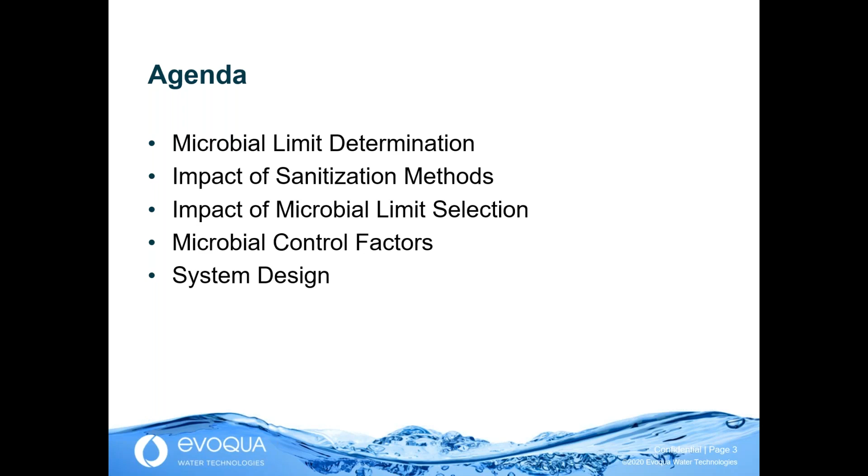An hour is a short time for this amount of material—we could fill 8 hours with it. So we're going to go at a very fast pace, but I think we'll be able to give you a good overview. First, we're going to talk about regulatory requirements and risk assessments.

So how do you determine the microbial requirements for your water system? You need to know the product types produced and their use. Your team has to be able to do a patient risk analysis from that product use. What's the point of manufacture? Where are the products shipping? What is the water used for? It could be for active ingredient production, rinsing, or in a dosage form. Even if it doesn't remain in the product, such as in a tablet, the water still falls under good manufacturing practice.

In addition, you need to know the pharmacopoeia limits for the water—typically purified water or water for injection. There may be additional regulatory documents to consider. Some of those could be legally binding, some may be non-binding, but if it's a regulatory guide that could be applicable, you want to know what's in it and understand whether you should follow it, or if you don't follow it, how you could explain why you don't need to, or that you're doing something better.

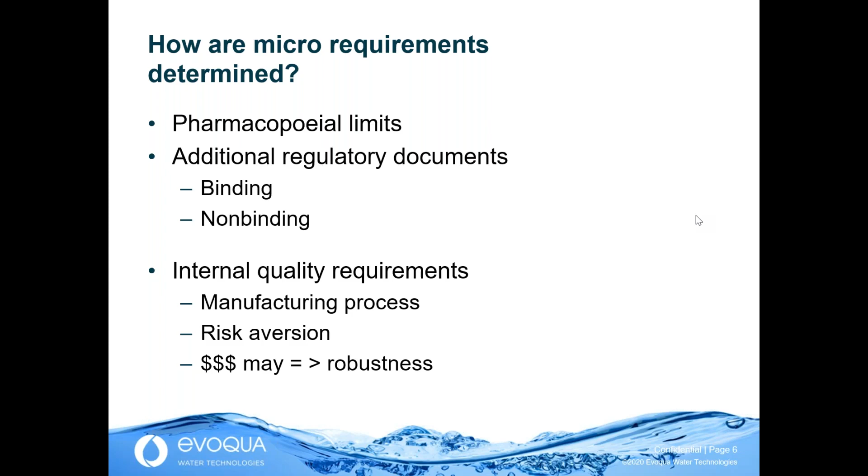Thanks to A.M. Cundell for this slide, but it's an overview of products.

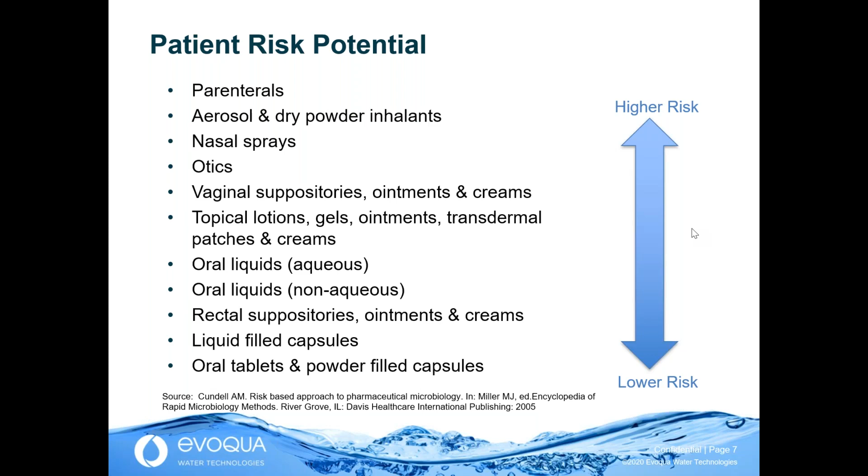So parenterals, as an example, aerosols, nasal sprays, those are high up from a patient risk standpoint, whereas liquid-filled capsules, oral tablets, etc., are at the lower risk. So this may help you to start with an understanding of risk.

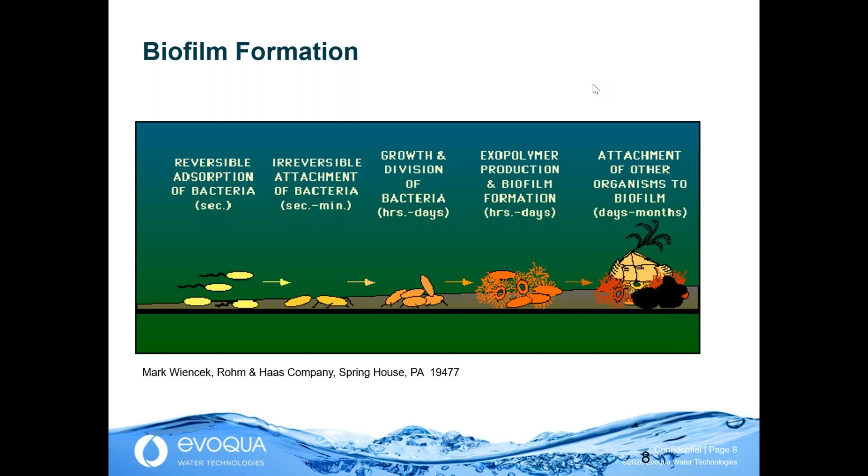Getting into pharmacopoeia requirements, the current USP Pharmacopoeia, edition 43, in the purified water and water for injection monographs, that's the legally binding section for water. Interestingly, the microbial limits are not stated there. So you might say, well, there's no legal requirement. In the general information chapter 1231, that is where purified water is shown at less than 100 colony forming units per milliliter. Water for injection is less than 10 CFU per 100 mil. But everyone accepts these as actual limits.

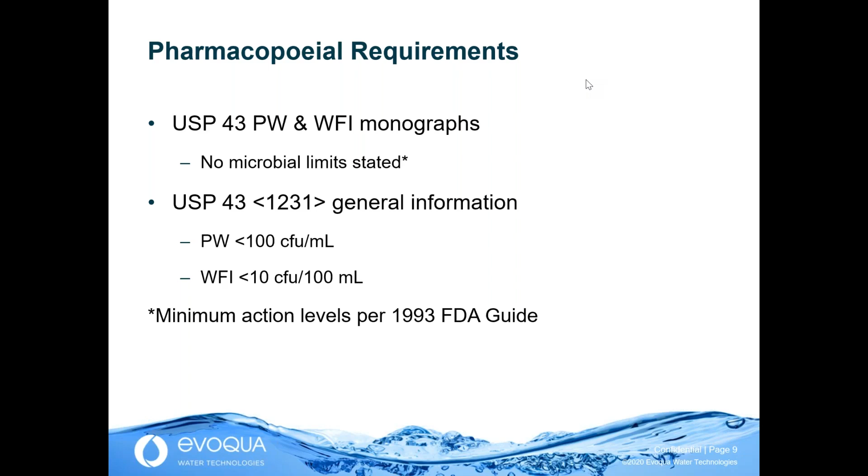In the 1993 FDA Guide on Inspections of High Purity Water Systems, FDA stated that these levels, which remain current from that time, they actually take them to be in the monograph or not as actual limitations. If we look in the European Pharmacopoeia, there we have the same values, 100 CFU per mil for PW, 10 per 100 for water for injection. Those are in the monograph.

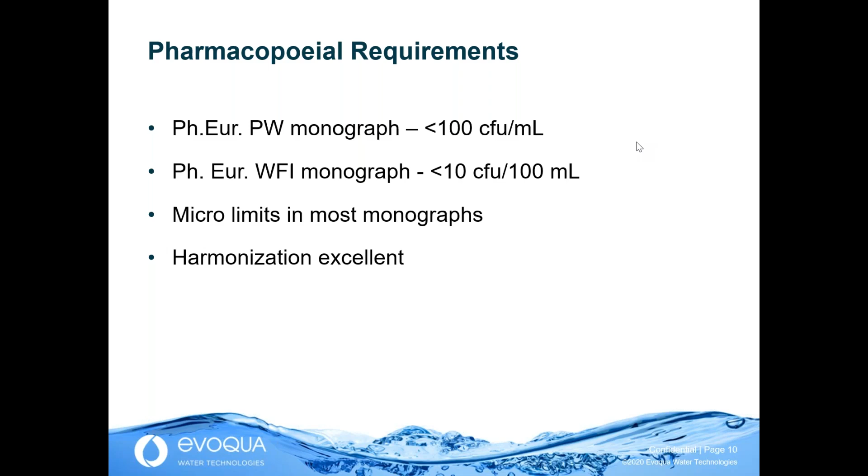Looking at this, there are over 140 Pharmacopoeia worldwide now and ever growing. In most of those, the microbial limits are in the monographs, making them clearly legally binding. And fortunately, there's excellent harmonization worldwide on these levels for purified water and water for injection.

The next topic, objectionable organisms. This may apply to you and your company or not. As an example, in 21 CFR 211.113 for non-sterile drug batches, you have to assess the drug administration, the product, the patient risk, and do you need to prevent objectionable organisms, organisms that could cause infection, that would present patient risk. So this is not telling you that you do have that issue. It's telling you you need to assess it. You need to see if you have the issue and then how you would demonstrate that it's addressed.

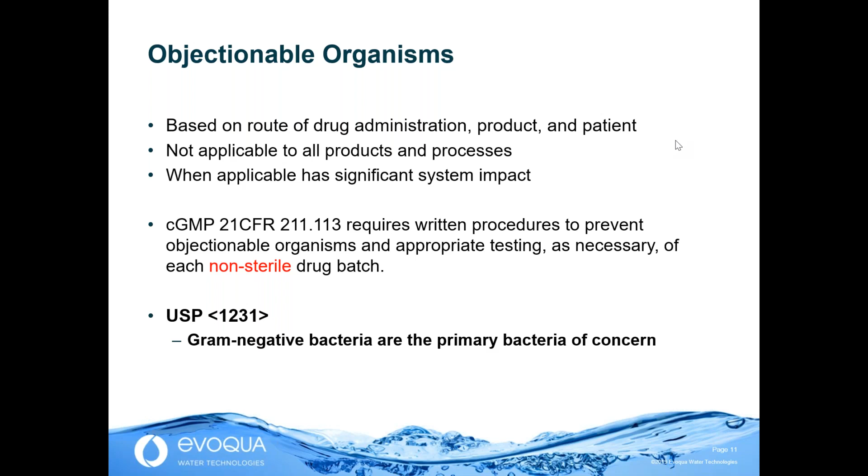In that general information chapter in USP 1231, the same topic is discussed, and generally it's gram-negative bacteria that are typically the bacteria of concern. There are two other USP sections, 60 and 62. 60 is relatively new, and they aren't water specific. The more recent USP 60, it's the Burkholderia cepacia complex that you're requested to analyze. That complex could include Ralstonia pickettii as an example. The USP 62, you can see the list of organisms, principally gram-negative bacteria. So this is similar to our prior discussion.

It does not mean that you have to prohibit these organisms. The monographs just give you a total plate count. They are not organism specific. You're required to understand your product, process, patient risk, and see if you need to prohibit all of these, some of these, if these pathogens could present a problem with your product.

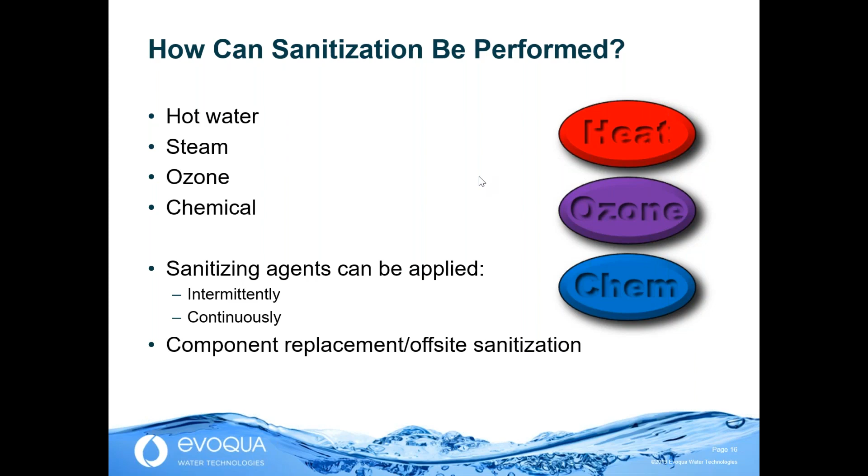The sanitizing agents can be applied intermittently or continuously. In some cases, for components where sanitization is not appropriate, replacement can accomplish that. In some cases, ion exchange resins may be sanitized off-site.

Continuous sanitization—normally this is the tank, when there's a tank, and sometimes the loop—we're talking either hot water or ozone. If the water's going to be used hot, then high temperature water is generally best. And what we mean by continuous sanitization or self-sanitizing, it's always in a lethal condition. There isn't a sanitization procedure per se, unless it's remedial, because it's always being sanitized.

If the water will be generated at ambient temperature and used at ambient, ozone may be a better choice. It's a very good choice, and so there is no flush required. The ozone in water will be converted to oxygen—we'll talk more about that. So the water is staying in a very pristine microbial condition continuously, but then is suitable to go to use.

In WFI, the heat is more common, and in purified water, heat is relatively common. Ozone is growing at a very fast pace.

Intermittent, meaning that now there's not always lethal conditions to microbes, so water is typically ambient. The more the sanitization is performed, the better. When it's automated, it's more likely to be done more frequently without operator intervention. It's best when you're using the water at an ambient temperature. Heat and ozone are both effective. The chemical is less effective, but it's not the point of this webinar to try to talk you out of chemical at all. If it's just purified water, if it's the 100 CFU per mil limit, chemical is proven to work effectively in thousands of systems, and it's in many manufacturing systems and many lab systems.

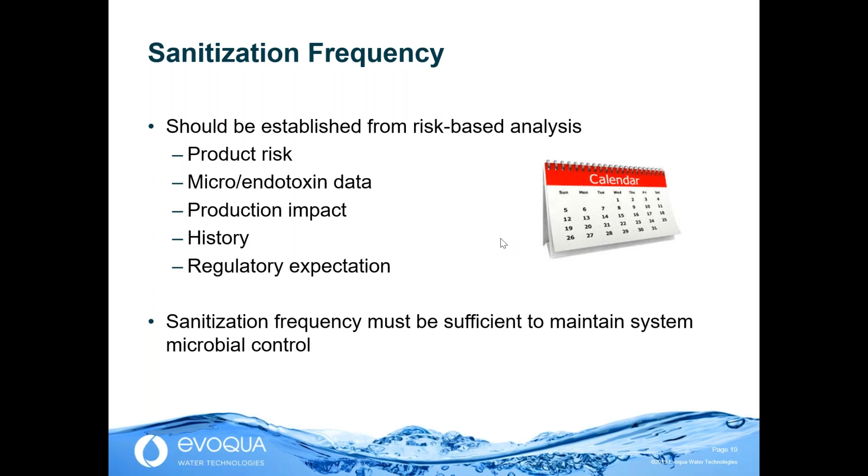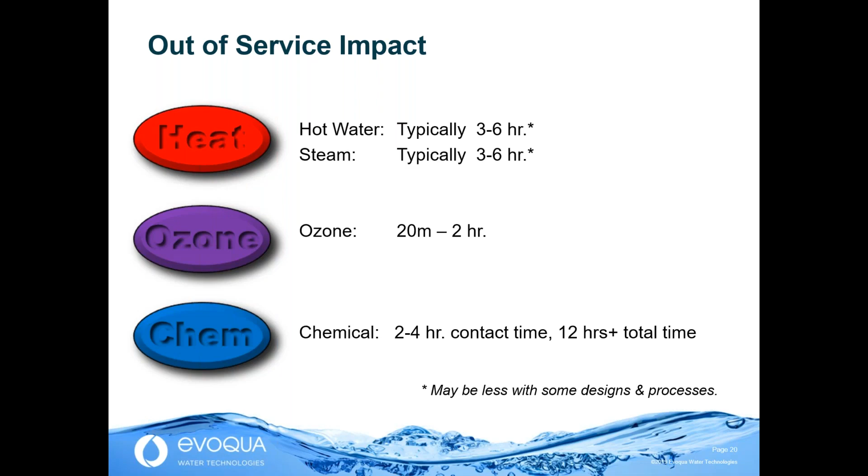Time out of service: hot water, 3 to 6 hours generally, could be more in some cases. Ozone can be quite fast, as little as 20 minutes to a couple of hours. Chemical is generally the longest—there are a few hours contact time, but then there's often extensive rinsing time that could make it 12 hours or more. A quick view of outage time.

Now let's look at what is the impact. When you pick a microbial limit, what is the impact? You have to design to be consistently below that limit. So if the limit is 100 CFU per mil for purified water, you can't design a system that's going to consistently run at 90 CFU or 50 CFU. With microbial growth spurts, it's too easy to go out of spec. So no matter what the limit is, you're always designing conservatively.

Drinking water is only 500 CFU per mil for EPA drinking, and that's really worldwide a pretty popular number, so you're not even being asked to be a log lower. So the purified water max is pretty attainable. It's not an issue for most systems, and certainly if a system is well designed, well maintained, there should not be many failures, if any. This is a generous limit, a wide variety of designs, materials—it may be chem sanitization, polypropylene distribution.

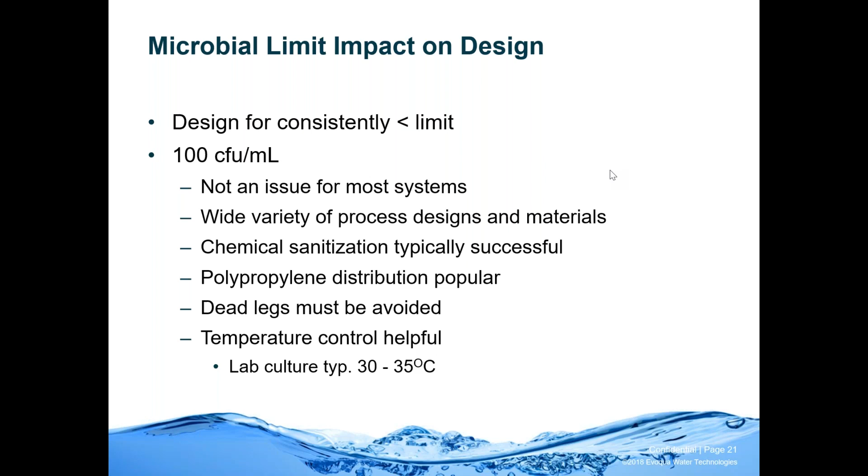Dead leg avoidance is critical, and that's true of every system we're going to talk about—generation, distribution. Dead legs are the enemy when you want good micro control. Temperature control can be very helpful here, often overlooked. When you think of making bacteria grow rapidly, in lab cultures it's typically done at 30 to 35 degrees C—that's to promote growth. Therefore, you don't want your system getting into a temperature range that's going to make bacteria reproduce rapidly.

So now we've said 100 CFU per mil is not very difficult to meet. What if it's 100 CFU per mil purified water, but no gram-negative bacteria? It could say no gram-negative bacteria, no Pseudomonas aeruginosa, no B. cepacia, etc. That changes everything.

Now meeting the 100 CFU per mil becomes a moot point. The system is going to be designed to have no bacteria, if possible, because many of the waterborne microbes are gram-negative. So it's going to take a much tighter design. Chemical sanitization presents a significant risk for this goal, so heat or ozone become recommended. And the real issue is recovery from failure. If you have failures with chemical sanitization only, no capability to go to heat or ozone, that's where the risk is presented.

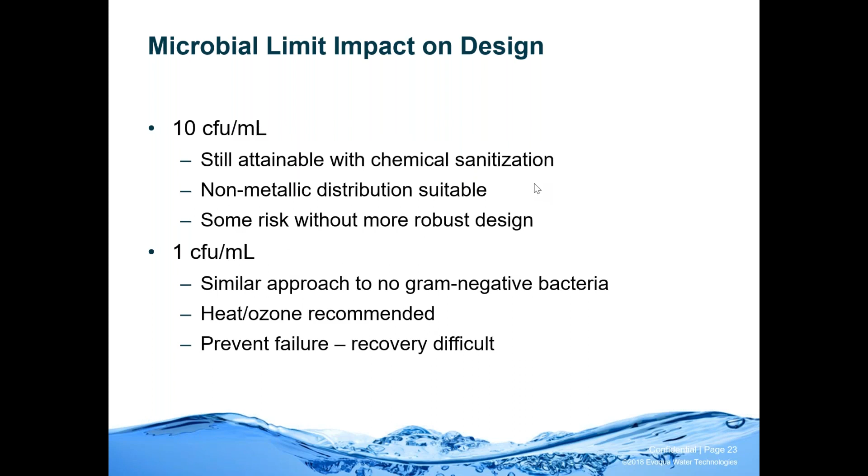Now let's lower it to 10 CFU per mil, still in the purified water or non-compendial water domain. I think that chemical sanitization in a good design still lets you attain that, still using non-metallic materials. So there's some risk here, maybe more frequent sanitization, but still you have a wide range of system choices.

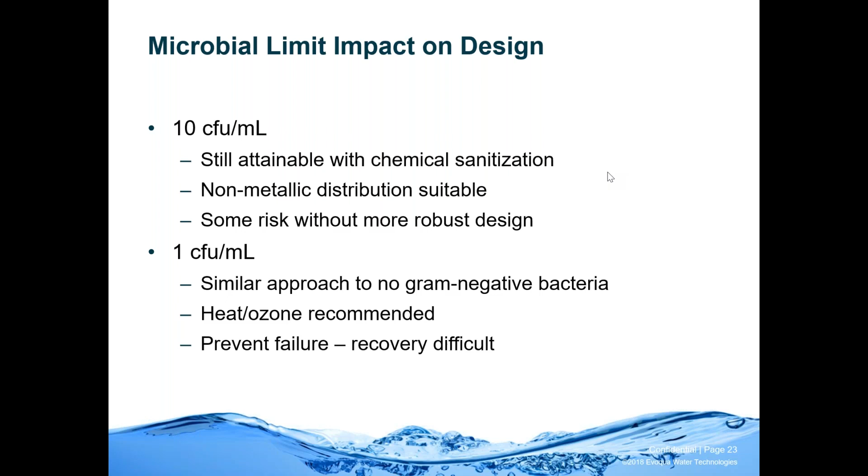We drop to 1 CFU per mil, and now I would not say a simple, chemically sanitized system only couldn't do it. I would say there's significant risk in this because, again, if you start to fail, you may have a very difficult time getting out of it for future consistent operation. And now heat or ozone sanitization, and it may be heat at generation. Ozone is really a distribution sanitant, not generation. But the more robust methods become recommended.

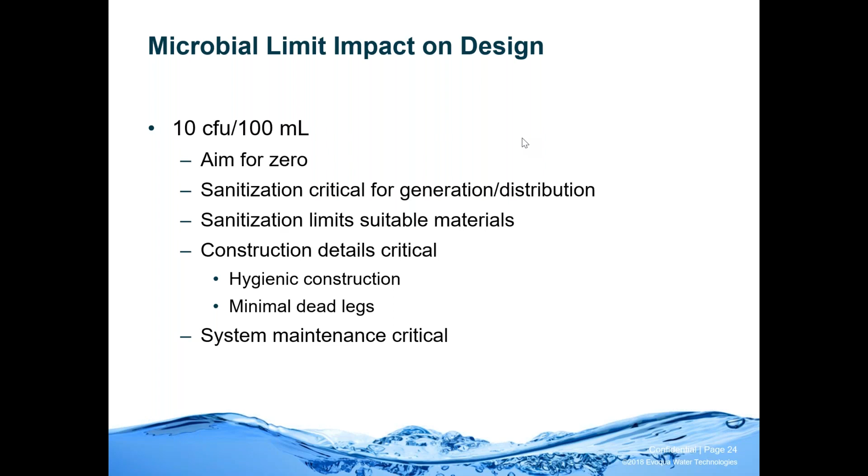So how do we make systems that meet these microbial goals? First, you have to start with drinking water quality. In the US, it would be US EPA National Primary Drinking Water. In other parts of the world, there are other drinking water authorities with pretty equal requirements to US EPA. So you need to start with good water or make it good. If it's not consistently good, you may want to enhance the water source. That may mean adding chlorine, or it may mean adding microfiltration. We'll talk a little further about that.

We'll look at the process design, but it isn't just the process. You can have the right process components, you still need the right materials, you need the right sanitization method and frequency, you need the right operation. So you're going to manage external contamination, and the overall goal, again, is minimizing biofilm formation.

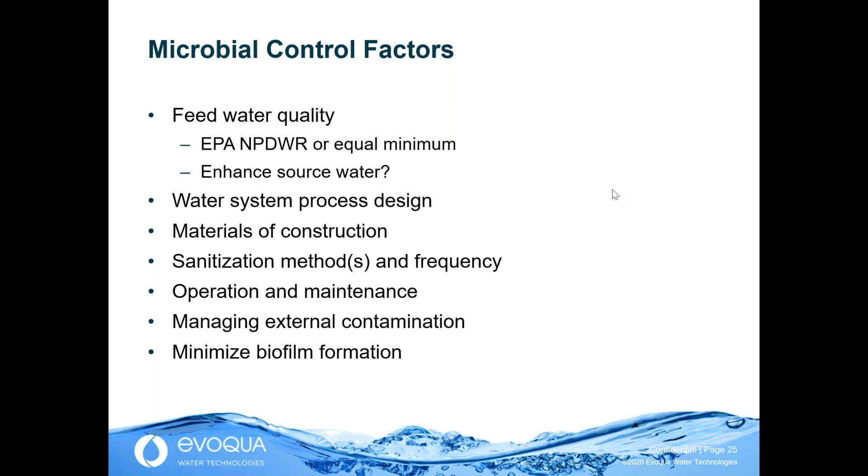We're going to look at the generation process units. And the control strategies we're going to look at: keeping residual chlorine where it can remain, possibly continuous circulation where there's no disinfectant. In distribution, there's always continuous circulation. There's been a belief for decades that circulation helps in minimizing microbial growth, and it may help, but it can't stop it. Circulation isn't lethal. So there are successful start-stop systems, start-stop with appropriate flushes. But certainly circulation in non-chlorinated parts of the system is a consideration.

Membranes are frequently employed. Of the microbial reduction processes, now we're going to implement membranes, meaning reverse osmosis, ultrafiltration, submicron filters. We'll assess those. Ultraviolet light is effective. Distillation, certainly operating above 100 C, is an effective microbial control tool. So we want to minimize unit processes that promote microbial growth. We want to maximize, or put in, ones that reduce the counts, all while considering in the components periodic flushing, backwash, regeneration,

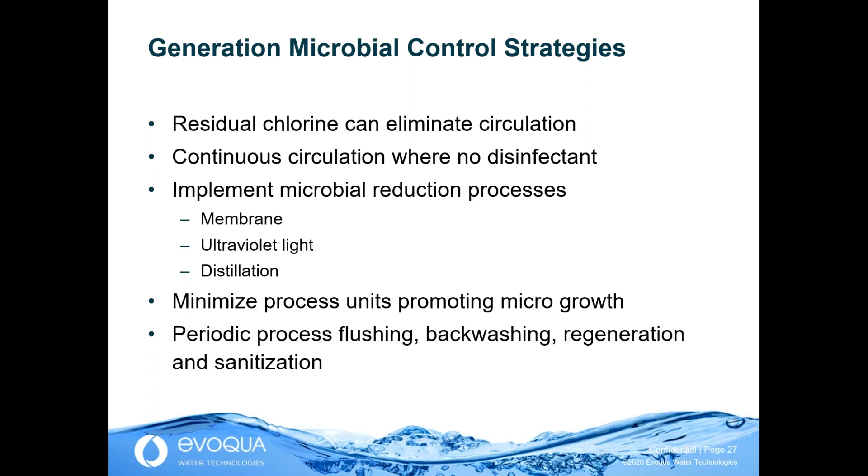and certainly sanitization. So in the United States, every municipality uses a form of chlorine, either free chlorine or chloramine. And these relatively low levels that are shown, 0.5 ppm free, 1 ppm combined, often will provide a good quality feed water well within EPA. It's relatively common in systems to supplement the chlorine level if it's not consistently good from the municipality. In private supplies, it's very common to add chlorine to the well water, untreated river water, whatever that private supply is, to assure the starting water is meeting drinking water requirements and is good microbially.

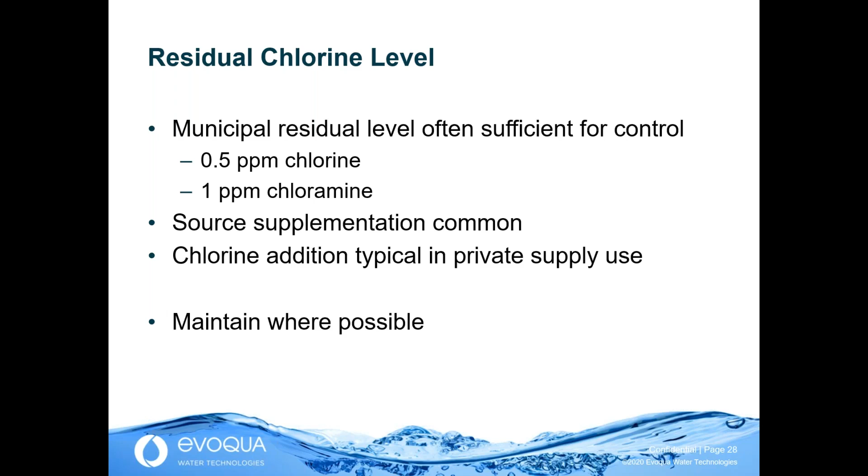And we want to keep chlorine in the system, but if we look at the components, early pre-treat microfilters, multimedia, screen filters, etc., typically they're chlorine tolerant. Softeners can take maybe up to a part per million before resin life becomes bad. But the more expensive components, reverse osmosis, continuous deionization, UF maybe, but after RO or CDI, EDI, there won't be chlorine there anyway.

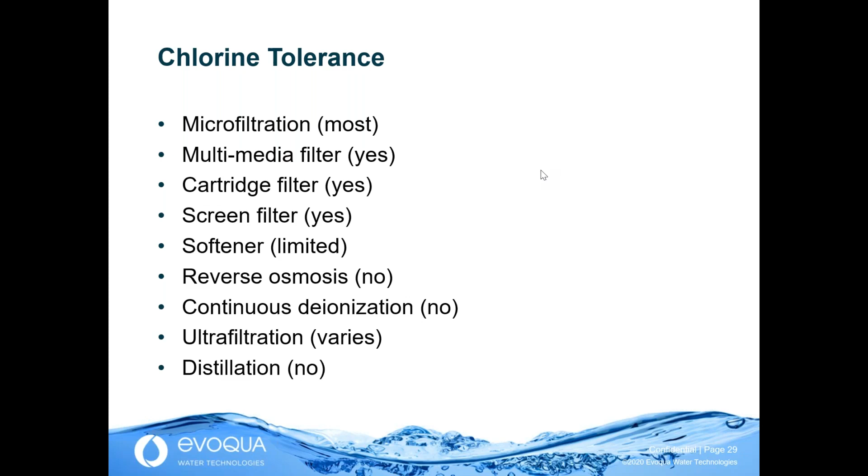And stills are not compatible at all, so there can be significant damage to expensive components with stills. Although chlorine helps, it can only stay in a limited part of the system.

We talked about temperature control as being very overlooked in many systems. Avoid temperatures that promote growth. Below 20 degrees C is extremely effective, even at 25 C can be quite effective. And there are cold process systems, those are more in the 4 to 10 degrees C range. They're cold for process, not for micro control, but the micro control is extremely effective.

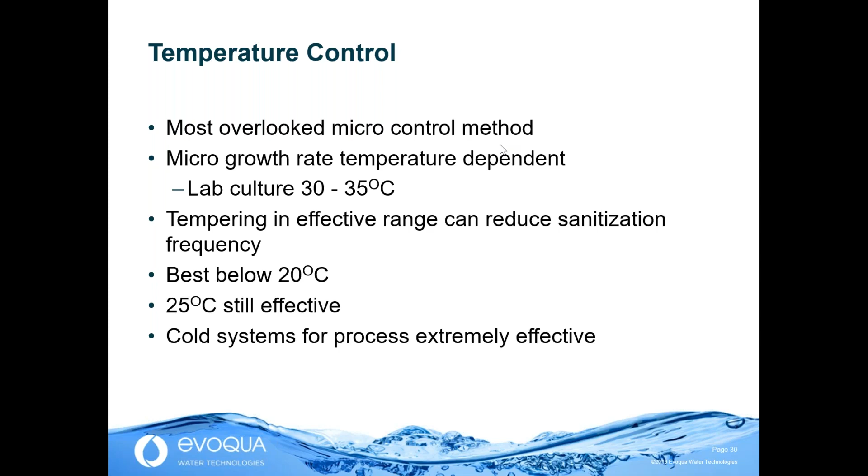So cooling should be considered in generation and in storage distribution.

At the start of a system, there's often a type of filtration. These microfilters, there are many different membranes and types, but they are capable of removing fecal coliform, cryptosporidium, Giardia lamblia cysts. They can give a multi-log overall microbial reduction.

A common use is where the sources are not consistently meeting drinking water quality. These are often put in to remove coliform, remove crypto, and bring it to EPA or equivalent levels. They are a very good tool. They're not an inexpensive tool. So if you can accomplish the same thing with chlorination or another alternative, you may go that way.

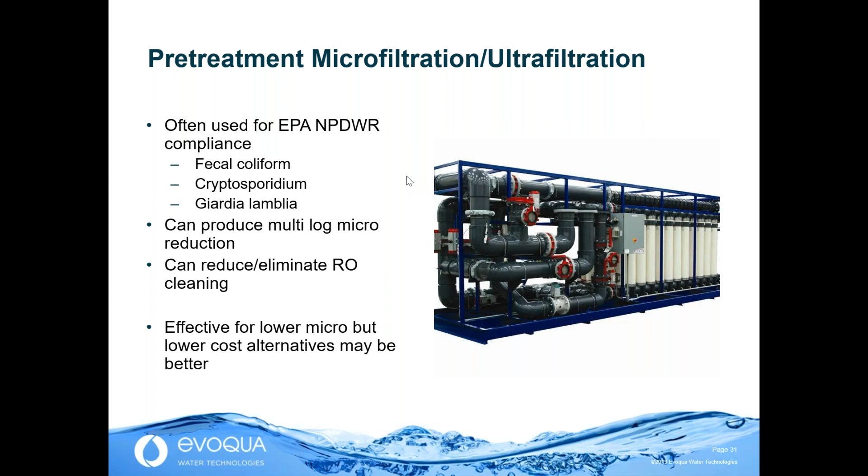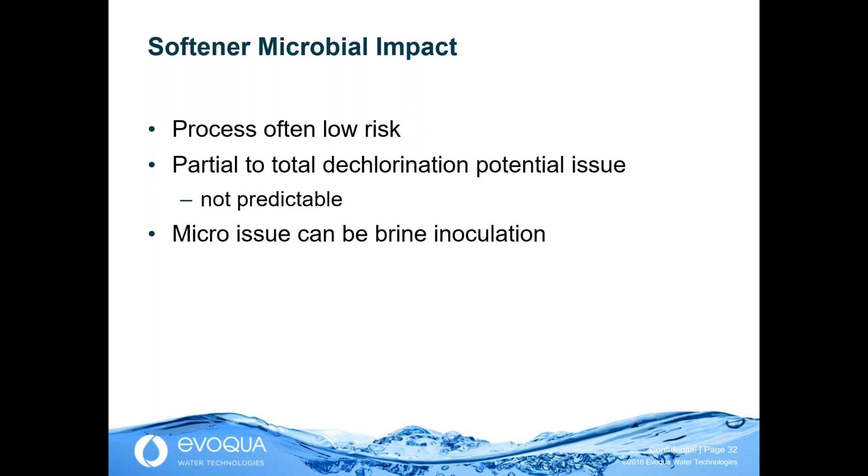Softeners, the most common form of scale control ahead of reverse osmosis, ahead of stills, relatively low risk, typically not a huge micro issue. The brine can in fact sanitize resin. At times, not common, but the brine can eventually become a microbial source. So actually, when you're regenerating, you may be inoculating the softeners, and then you need remedial action or adding a sanitant to the brine.

So if we look at the construction, most of the time in inexpensive construction, FRP tank etc., sanitization with peracetic acid is usually good enough. You can build softeners for hot water sanitization, no problem with the resin, but typically all stainless steel construction, and that money may be better spent elsewhere, and usually is.

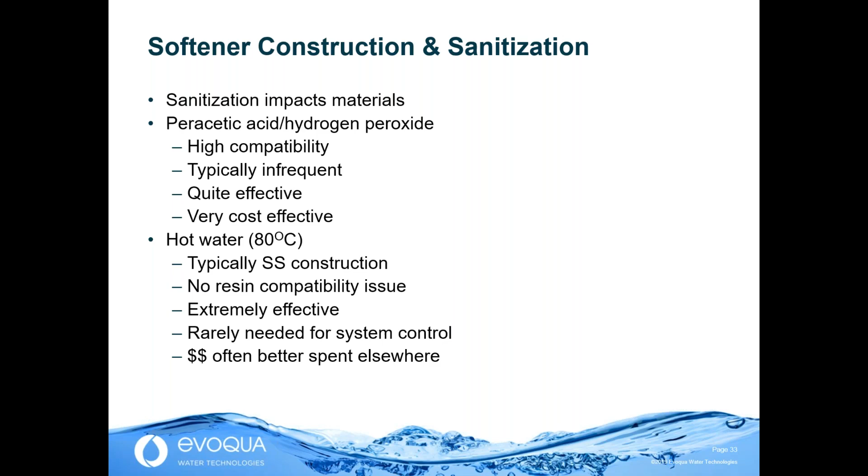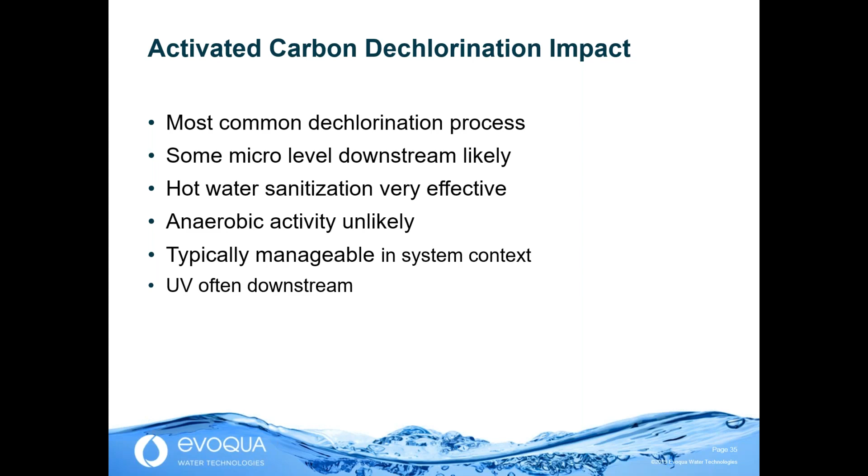Hot water sanitization is very effective, and so even though there may be some counts, it's typically manageable in a total system context. And often ultraviolet light is employed downstream of carbon and is very effective in knocking those counts down if they're there. Chemical injection, typically sodium sulfite or bisulfite, it's often believed to be far better than carbon microbially, and that is possible if it is optimized.

If an amount that's just above the stoichiometric requirement to destroy the chlorine is consistently there, it can be very good, but often it's over-applied, and that, from promoting anaerobic bacteria growth, there can be some serious fouling problems. If it's under-applied, well, now that leaves residual chlorine, which may cause oxidation issues. So the point isn't to say that it can't work. It's to say it's not always better than carbon microbially and can be less operator-friendly.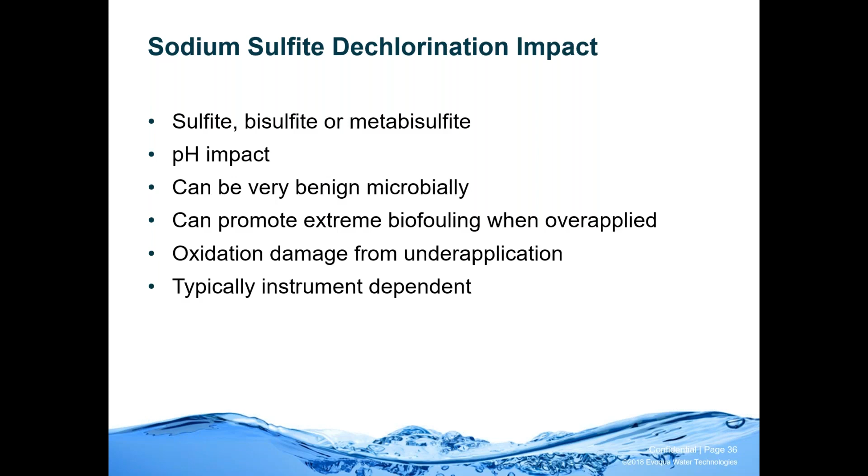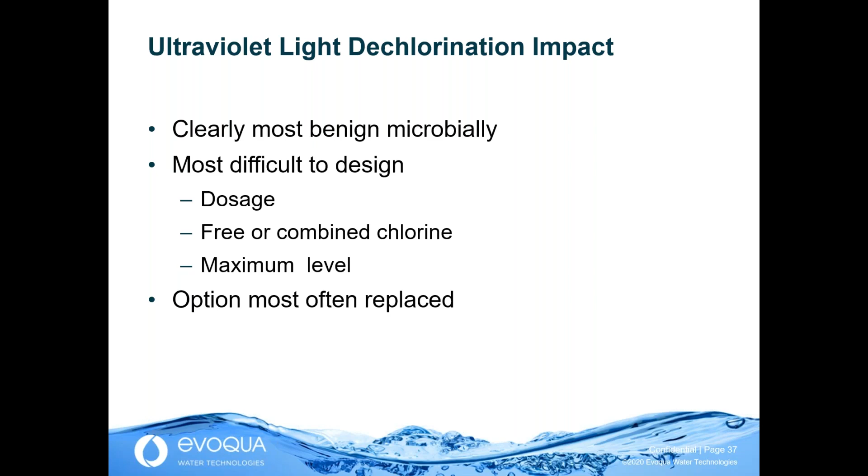And the only other real practical alternative, a high amount of ultraviolet light dosage, clearly the best microbially, because there's not only enough energy for microcontrol, there's far more to do the dechlorination, but it's the hardest to design, to determine the UV dosage, depends on the type of chlorine, the max level. And so of the three choices, when some are replaced because they haven't been working properly, I'd say the UV is the most replaced, and it's not the technology, it's the sizing that's not easy.

Now we're talking about UV light again, not for dechlorination, disinfection. Some people simply believe it doesn't work. I am not one of those people. I've had good experience with it for decades. It's not instant kill. It prevents replication of bacteria so they can't cause infection.

It needs to be employed right. Very good after carbon, as I mentioned. It may need filtration ahead of it to keep particulate from shielding microbes from UV. But it can be very effective in a total context of a system.

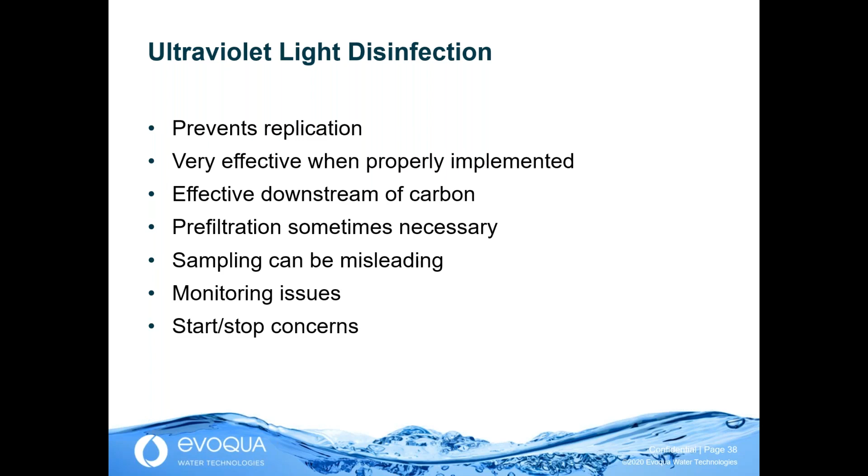Reverse osmosis, in the majority of pharma water systems, it's an excellent microbial barrier, an excellent endotoxin barrier. It does take the right construction, the right pre-treat, the right maintenance. Sanitization is either chemical or hot water.

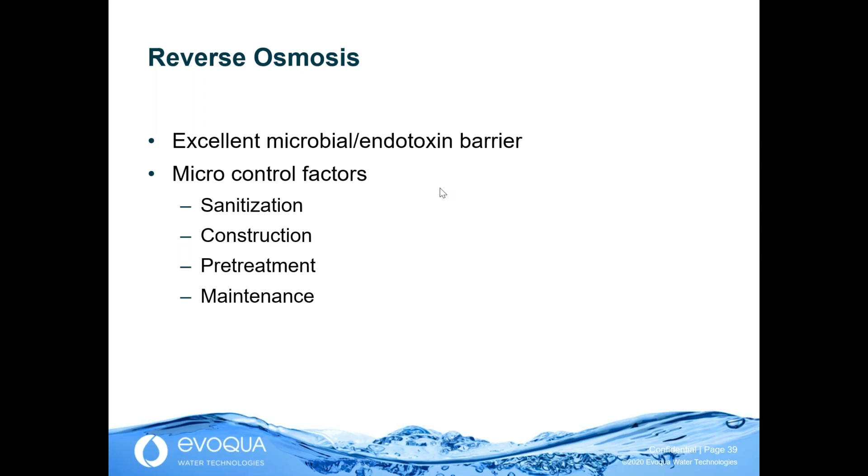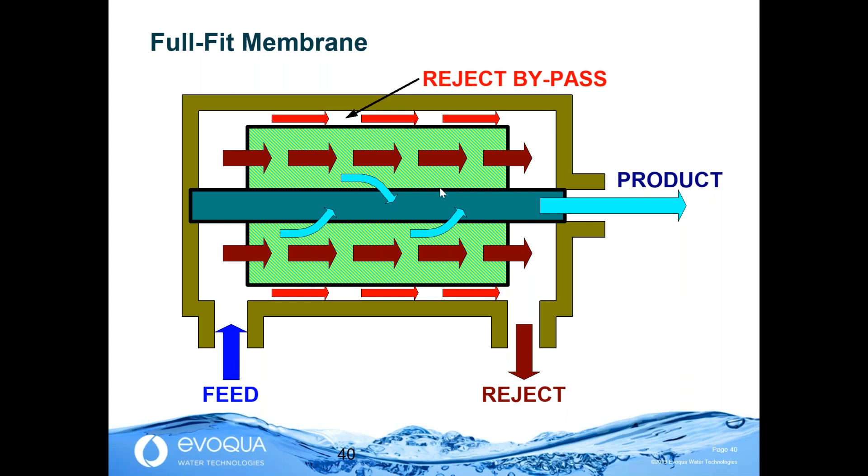A done right RO is an excellent tool in this total system context. There are non-pharma membranes, and there are pharma membranes called full fit or loose wrap, which allow a small amount of water between the outer wrap of the element and the pressure vessel and can help control bacteria in that area. All hot water sanitizable RO elements are of this construction.

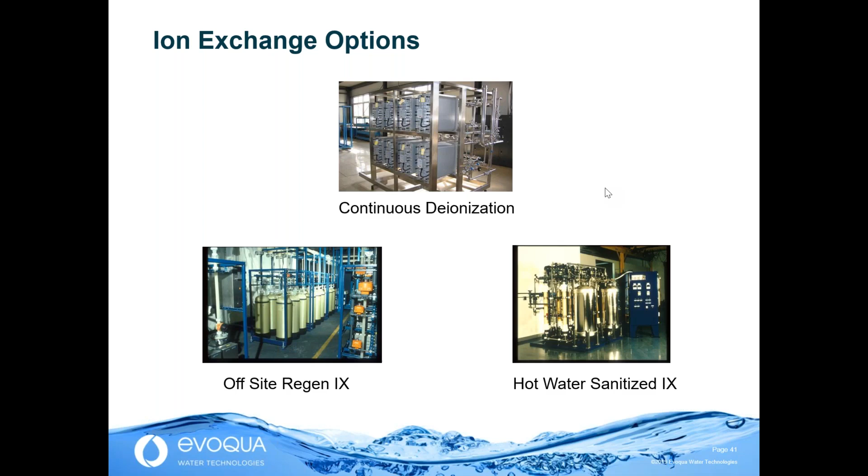In ion exchange, we have a few options. The top picture is continuous deionization, or generically electrodeionization. We'll talk about the microbial control attributes. Then ion exchange resin in vessels, which may be regenerated off-site or regenerated in place. The off-site regenerated can be done in stainless vessels with sanitary piping, hot water sanitized, but that's quite rare. So we'll compare the ion exchange options.

In electrodeionization, with the electric field, there is significant water splitting, production of hydroxyl and H plus ion. So locally there's very low pH or high, and this is biocidal. So not only are they not a microbial risk, they can actually reduce counts, and with the right construction, can be hot water sanitized.

Off-site regenerated resin can add some counts, but it can give a little bit of reduction. Hot water sanitization is rare. If the resin is regenerated in place, that's rare in the United States, but in other parts of the world it's more common. The regeneration chemicals, acid and caustic, can actually help if done frequently enough and can provide pretty good micro control.

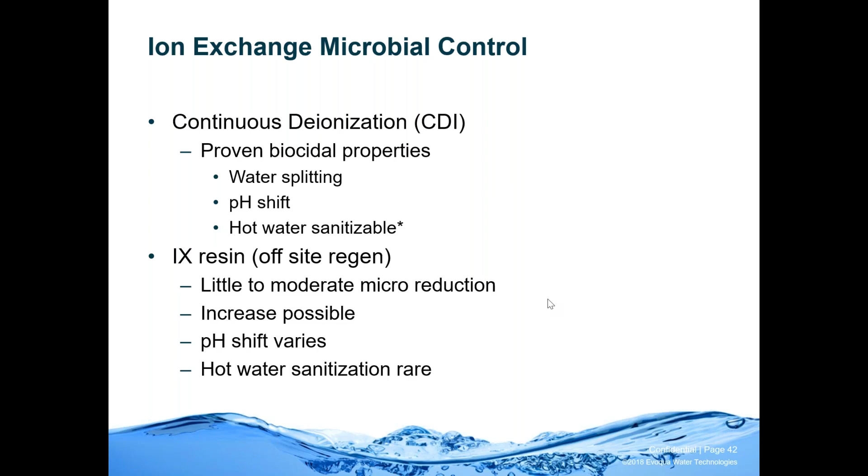Microbially retentive filters are the most controversial component in systems. They can be part of a total micro plan, but they should never be the sole solution. Regulators do not want to see a retrofit of these filters to solve a problem instead of solving the problem itself with better sanitization, better construction, better maintenance.

But when you have a good system with several barriers, these final filters, as they're sometimes called, are useful to produce water for injection and better. They are useful to meet no gram-negative bacteria requirements, and they can be integrity tested. The 1993 FDA guide on high purity water systems states that their use should be validated, including how to determine the period in use and the replacement schedule.

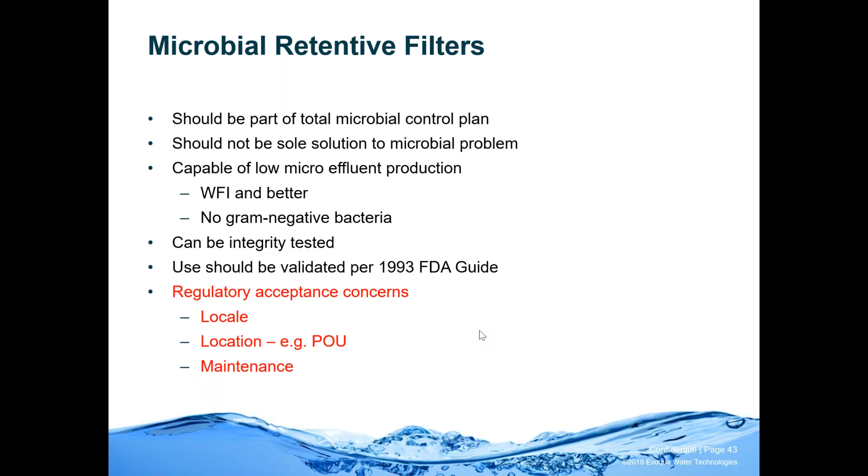I will acknowledge there are some regulatory acceptance concerns depending on locale. I talk with European people who say they're not as well accepted in European applications. As for location within the system, I would never put them at every point of use. No auditor wants to see 50 individual filters at every use point because they're going to question the maintenance. So it's about using them in the right place, minimizing them, but I'd say they're a very good tool to consider.

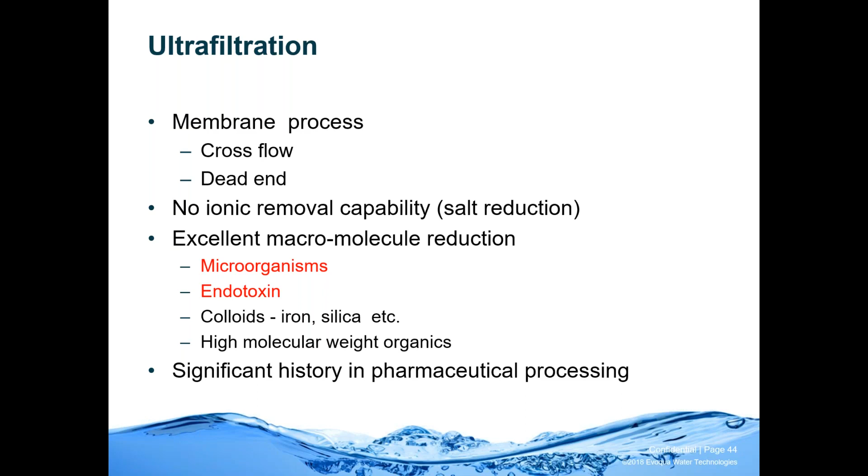In non-distillation water for injection systems, ultrafilters are in a very high percentage of those systems. And stills, there's not much to say. They're not a micro issue—certainly evaporating above 100 degrees C, they provide very good micro reduction.

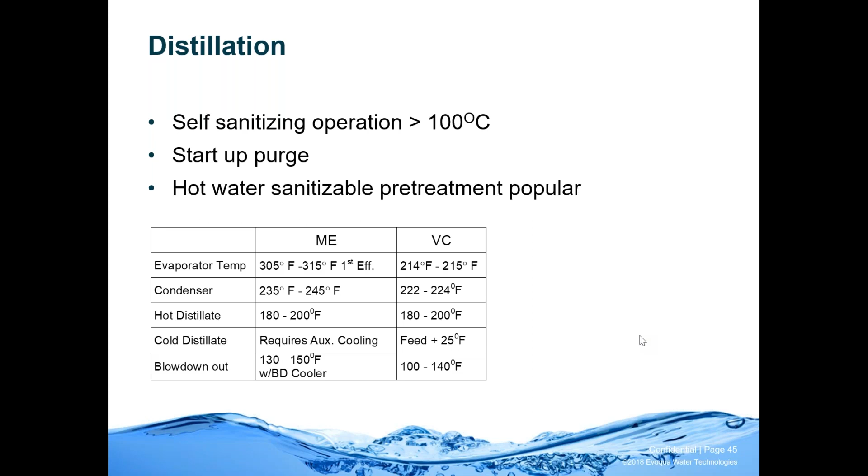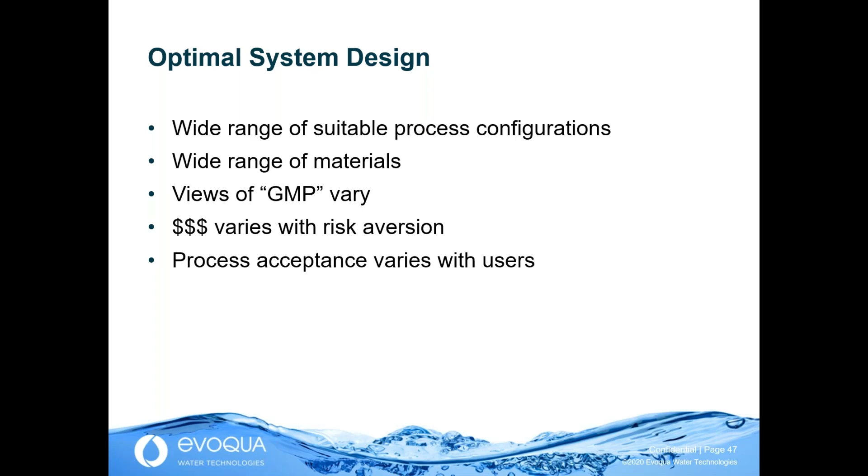So quickly putting some systems together: a wide range of configurations, a wide range of materials, a wide range of what is GMP. The greater the risk aversion generally means a higher cost, but what is acceptable is a tremendous variation between users.

Here's about the simplest system you could use: a little bit of filtration, some carbon pretreatment for dechlorination, an ultraviolet light for microbial control, ion exchange—again in the US, typically regenerated off-site—a final filter, and continuous circulation, often with a heat exchanger to control temperature. This could go to a tank or it could go direct to a loop.

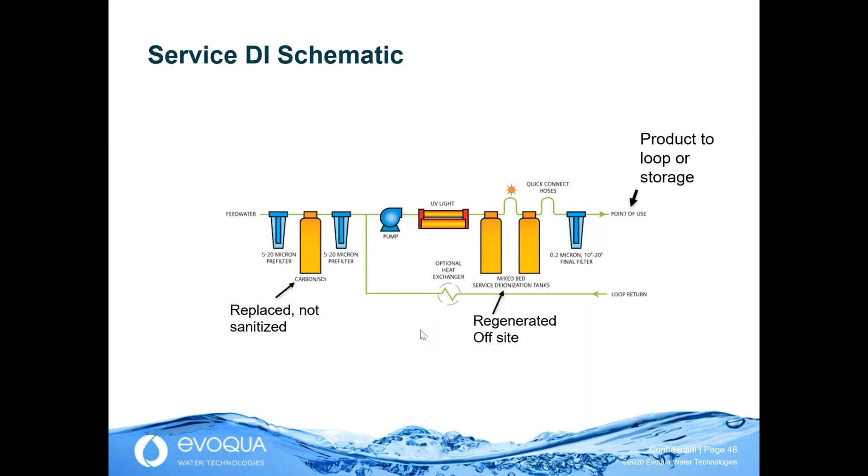Now there are many variations of this—we could put 100 flow schematics up that could all work. So this is a very generic configuration. If we assess it, there shouldn't be a conductivity issue, and there's typically not a TOC issue unless it's extremely high TOC feed. There's no membrane, but the ultraviolet unit could be a TOC reduction unit.

If you only need to meet 100 CFU per mil, there are thousands of systems out there like this that work. There's zero wastewater or minimal, and of all our possibilities, they're about the lowest capital cost, and they definitely can be a contender. You could say this is the least robust system possible compared to membrane systems and distillation systems, and yet these systems, done right, can certainly succeed. And as I've mentioned, if instead of off-site resin it's done in place, that enhances the micro control.

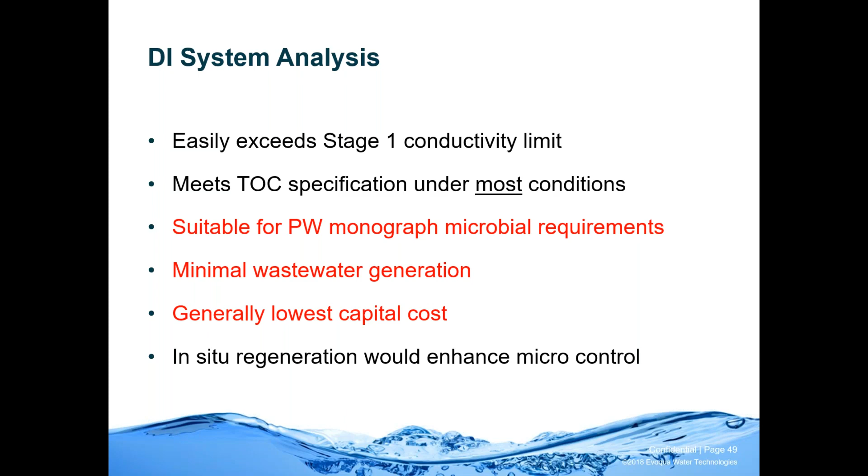Now, we could put 50 membrane systems up, but we'll take a quick look at one: media filtration, softening for scale control, carbon for dechlorination, some filtration, UV, and now starting with processes that reduce. The UV reduces microbes, the RO should, CDI or EDI should. There's potentially a post-CDI UV, and it shows an ultrafilter. This would be more appropriate for water for injection. There may be a final 0.2 or 0.1 micron filter.

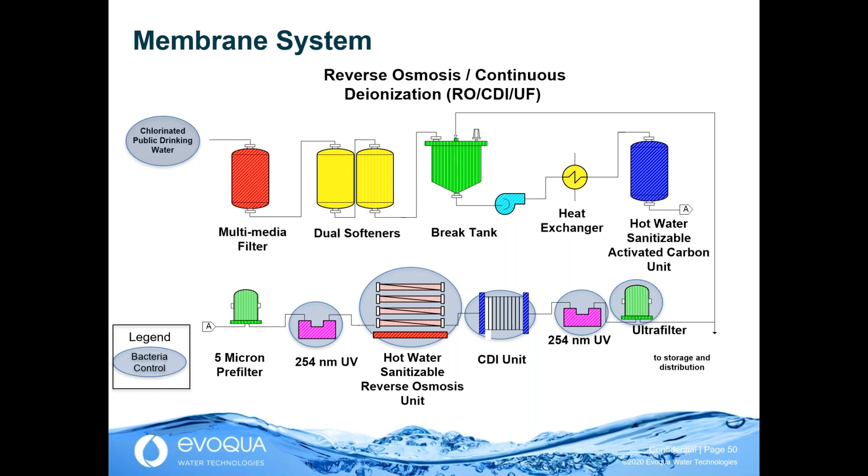So we have several microbial control processes. This could be hot water sanitizable, or it could be chemically sanitized.

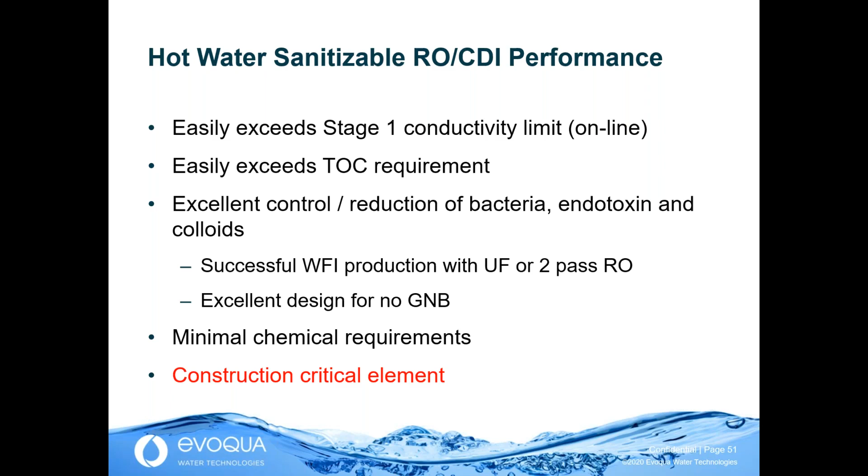If we assess this with hot water sanitization, it easily meets conductivity, total organic carbon, microendotoxin limits. There are units like this in successful operation for water for injection, for highly purified water, excellent where no gram-negative bacteria are allowed. So this is capable of water right through water for injection, but it isn't just the process, it's the construction.

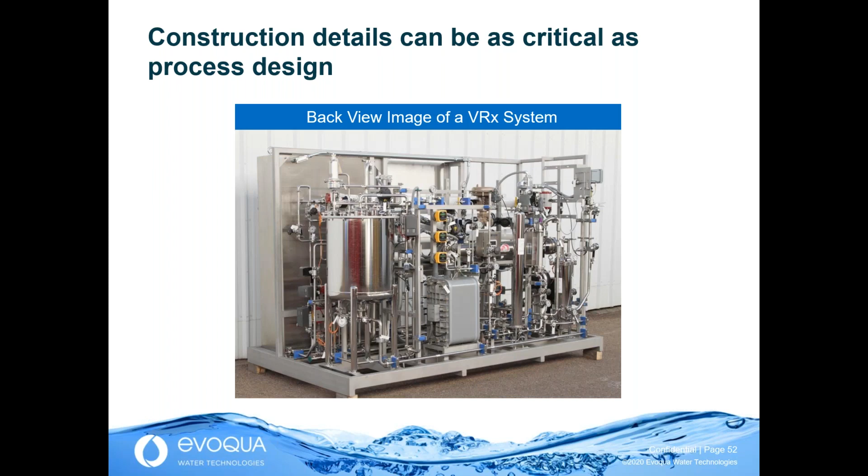And the maintenance. Here we see a process like that, a skidded system, but it's all sanitary stainless tubing, orbital welds, tri-clamp joints, and hot water sanitization. So the robustness really comes from the process, the construction, the sanitization and maintenance.

If this were a chemically sanitized system, it is going to still easily meet conductivity, total organic carbon, most micro limits. By the time it's no gram-negative bacteria or water for injection, the chemical sanitization, the lack of hot water sanitization increases the risk substantially. But yet, there are many systems like this, especially in other markets and in pharma.

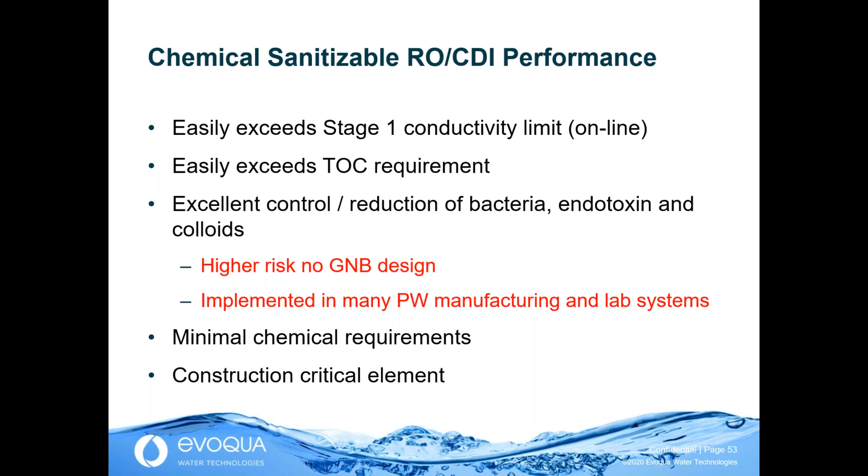But you also need to take into account regulatory expectations. So I would say in a membrane system like we've reviewed, if it is for water for injection, the hot water sanitization, I believe, is a must, both from a practical standpoint and from a regulatory expectation.

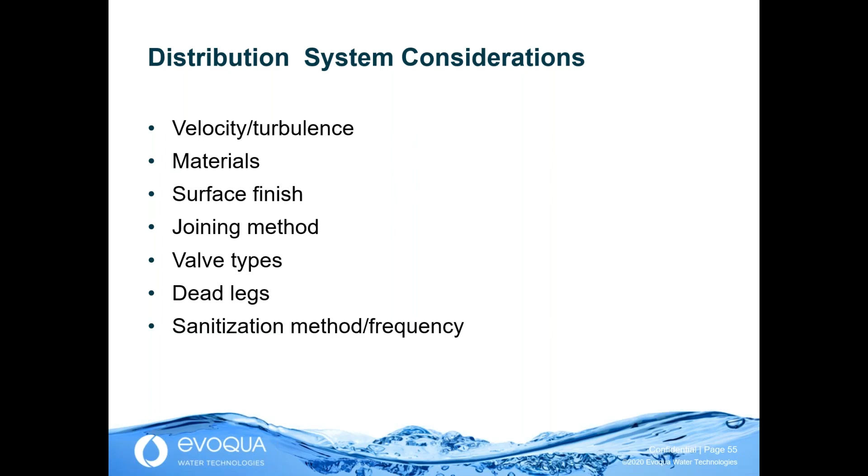In distribution, we're going to go through quickly the key elements. We'll quickly discuss the importance of velocity and turbulence, materials, surface finish, joining methods, valve types, dead legs, and sanitization. Surface finish, another great discussion.

I'd say worldwide, most water for injection, certainly in the US, is 15 to 20 microinches RA, and we have the metric equivalent shown after that. Purified water is more typically 25 to 32 RA.

The real question is, is that necessary? Could it be worse? Should it be better? Many consider these to be critical. I would say consider the application.

If you have your entire storage system continuously at 80 C every day, does surface finish really matter? Do you need 15 RA, which typically you get through electro polishing? I would say no. So although these are a pretty common range, really consider the entire context.

What if a tank is in continuous ozone presence? What if the loop is ozonated every day? And the final bullet really is important.

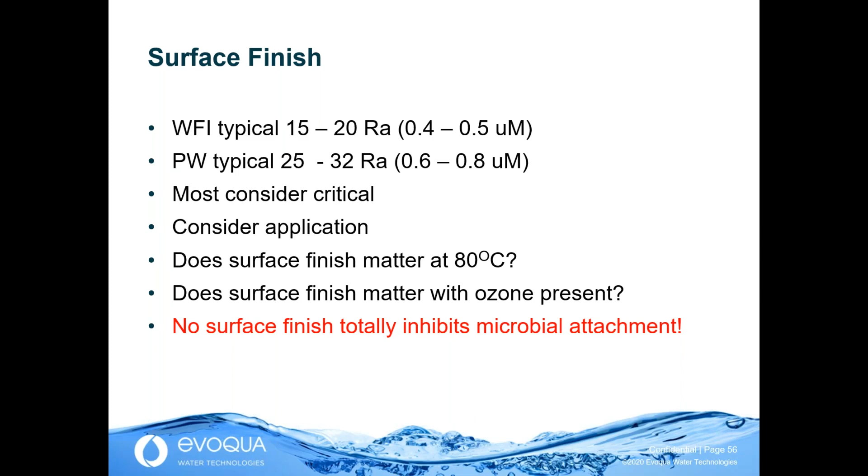No surface finish totally inhibits microbial attachment. This has been proven in many studies. Eventually, the microbes will adhere. So no matter what the polish or the surface, you still need sanitization. You still need other processes. You can't just polish your way to low bacteria water.

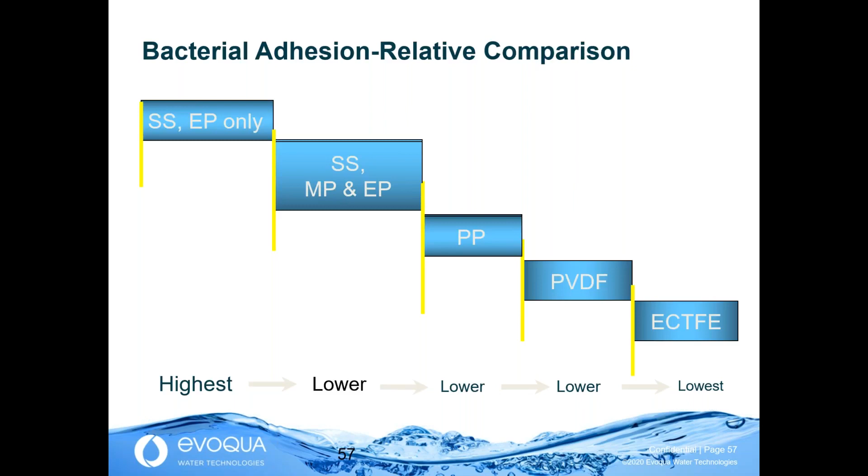Velocity. Another thing considered to be very important, and I'm not saying that it should be ignored, but let's ask the question: in your storage tank, what is the velocity? What is the Reynolds number?

It's obviously incredibly slow. It could be a tenth of a foot per second, a tenth of a meter per second. So the largest volume of water in your system is not going to have turbulence at all. There's obviously going to be laminar flow.

Within the loop, there's a lot of popularity to have the Reynolds number exceed 4,000. There is some logic to that. It helps in branch mixing. So even with small dead legs, velocity is going to help in branch mixing, keeping piping fully flooded.

Most of the time, the velocity is going to end up somewhere in the 3 to 7 foot per second range, maybe a little lower, maybe a little faster. It can't be too high or you suffer high pressure drop. If it's too low, then you may be wasting money on pipe and fittings that are oversized without good engineering practice.

Most agree that even if you're trying to have a Reynolds number above 4,000, above 8,000, if at max demand for a short period you have non-turbulent conditions for relatively brief, validatable periods, that's perfectly acceptable. You can waste a lot of time and money trying to achieve some specific velocity or Reynolds number under every possible condition, some of which may never happen.

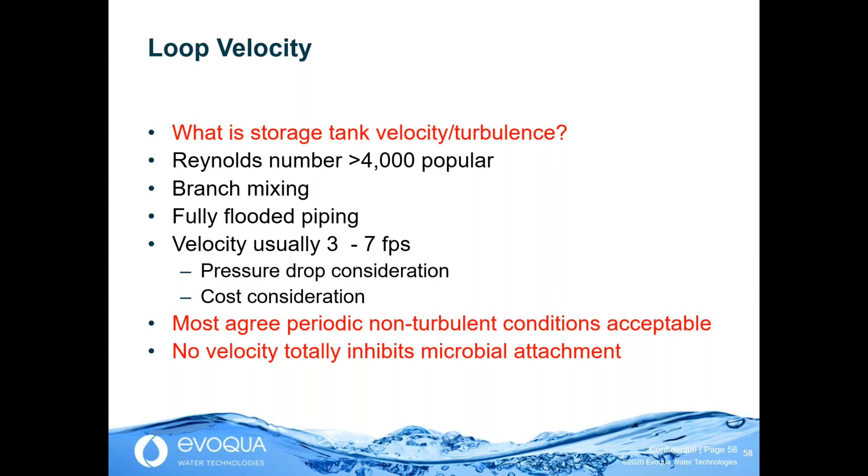Similar to the thought that no finish is going to stop microbial attachment, no velocity totally inhibits microbial attachment. So it can be useful, but sometimes it's overthought.

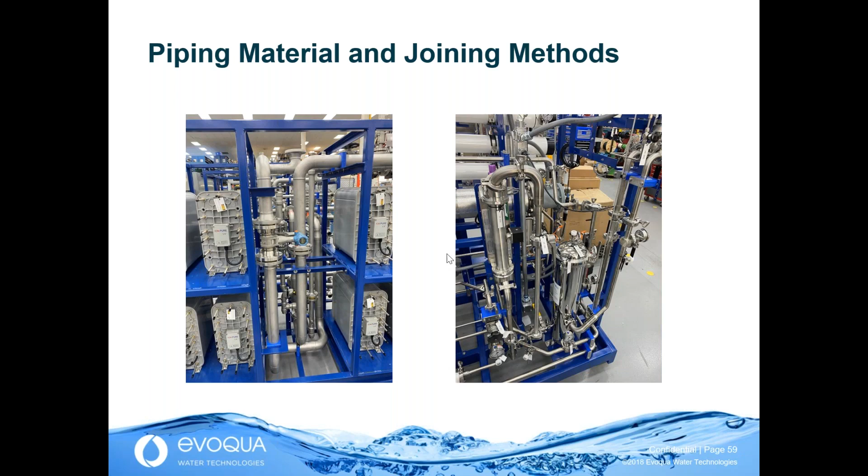The picture on the left is welded stainless steel pipe, typically more appropriate for sections of generation. I haven't seen this as a loop material in decades. The picture on the right is 316L tubing, orbital welded where possible, which is most places, with tri-clamp joints where required at components, instruments, etc. Certainly in the metallic world, this 316L tubing would be by far the most common.

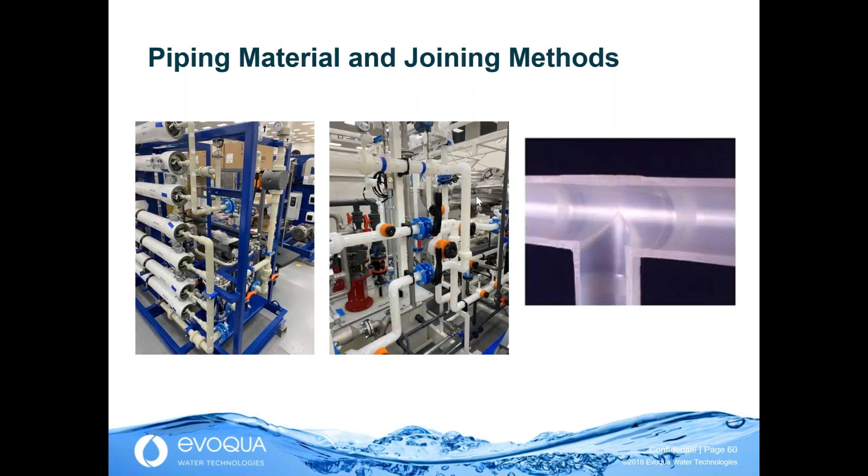Could be a great mate with, say, ozonated distribution if you wanted to do a non-metallic. We can't talk about microbial control without dead legs. Decades ago, there was a rule for a 6 diameter dead leg maximum. The diameter is the branch.

And it was measured from the center line of the main run, which really made no sense, and was based on a hot system, an 80 degree C system. It was based on conduction of heat.

Today, when we talk about dead leg diameters, it's from the pipe wall to, say, the weir of the diaphragm. There's a common goal to be below 2 pipe diameters, and in most diameters, in most cases, it's possible. It's not always possible - in tiny diameters, fractional inch, it can be difficult. But the 2D, it's a good goal, and I can't say enough.

Auditors and regulators understand unnecessary lengthy dead legs are not good, and probably merit citing, but they are a real problem, and the shorter the dead legs can be maintained, the better.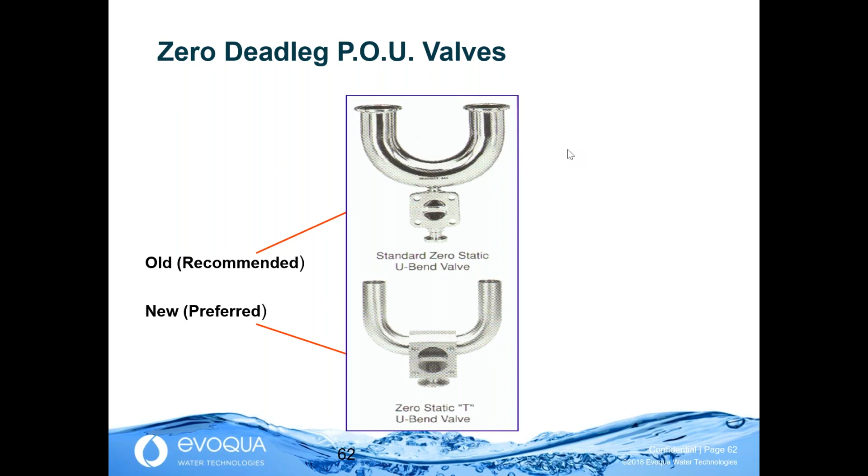It is your friend with chemical, heat, ozone, and really was a great thought to help us in microbial control. Good sampling - a valve that can protrude up into the pipe, easy to flush, minimal water volume - is going to give you more accurate sampling.

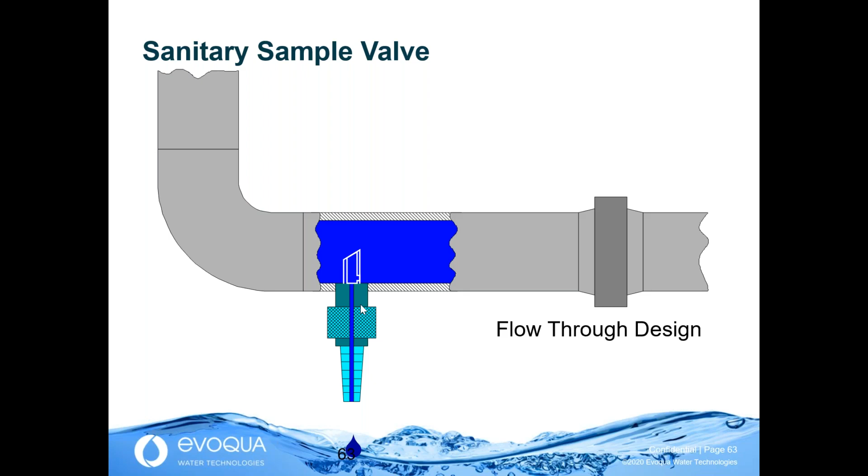We need to now do a quick study of distribution sanitization. So here we see chemical sanitization. This is typically ambient production, ambient use. The chiller or heat exchanger for cooling is a very good addition to be able to keep an unfriendly temperature for microgrowth.

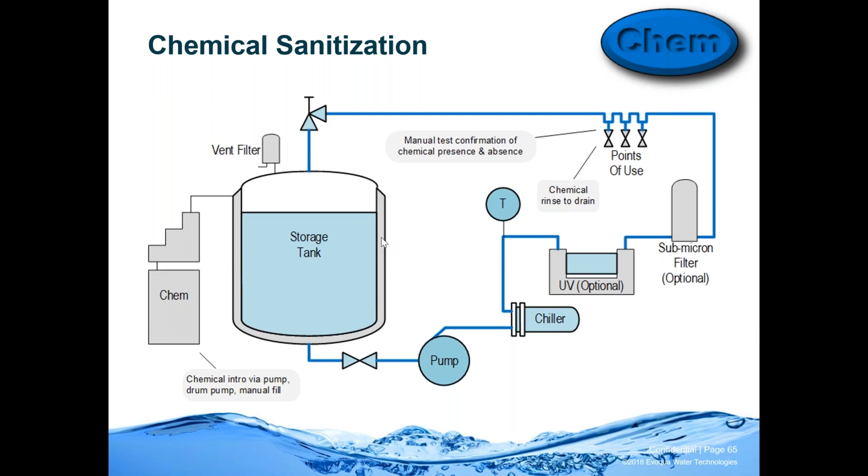The ultraviolet light shown is optional and the submicron filter shown is optional. I think if there's not a regulatory issue, if you can use both, they can help reduce the frequency of chemical sanitization, while still giving you good micro counts. And chemical sanitization is timely, expensive, and typically not done that frequently.

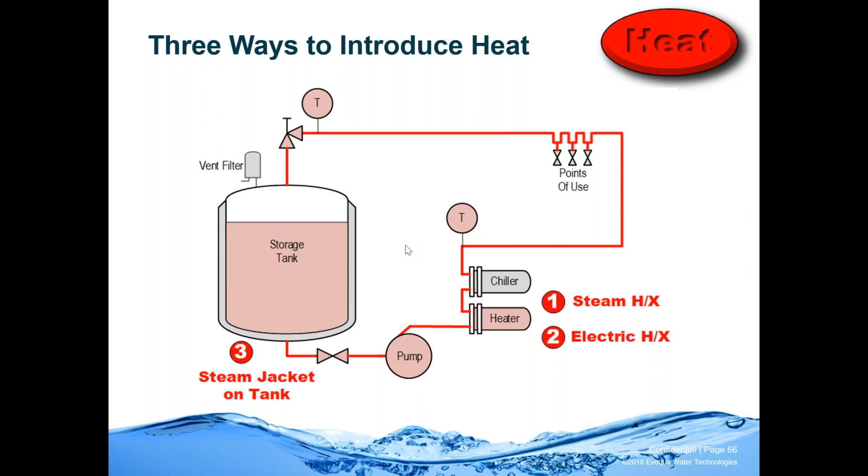If we look at heat now, heat could be in via a tank jacket, or it could be through an external heater that's steam or electric. If it's continuous hot, there is, of course, no risk. Ideal if you can use all of the water hot, or most of it. You may need use point heat exchangers in some cases.

If we look at intermittent now, when we're in operation at ambient temperature, again temperature control would be good. And here you have to debate use of an ultraviolet light and/or a filter once again. If they can be used, they can reduce the frequency of sanitization. If sanitization were going to be daily, it's kind of a moot point, and probably those polishing components are not required.

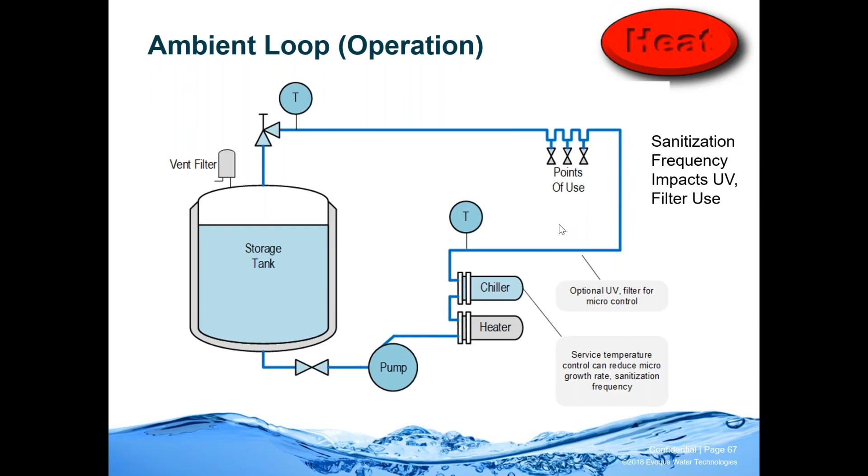And so when it's in sanitization, chillers off, heat exchangers on, and this has just proven over the decades to be extremely effective.

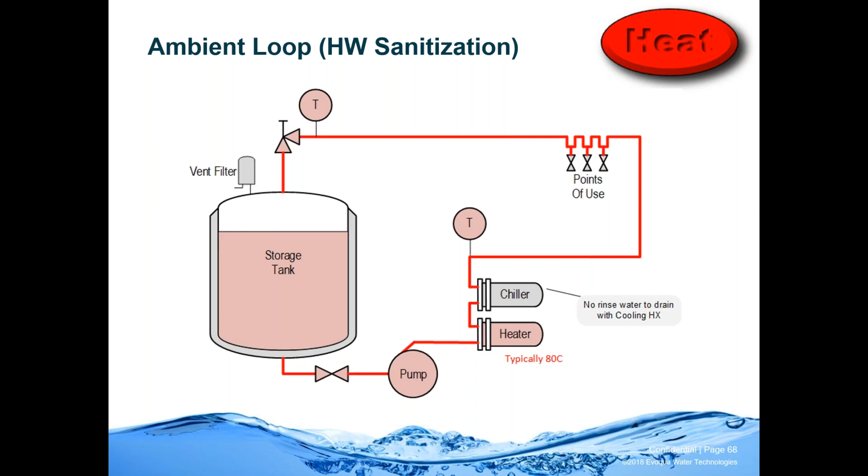Ozone is growing rapidly. Ozone at its best is continuously applied to the storage tank. It could be as low as 20 parts per billion. I'd say the most common range is about 50 to 100 parts per billion in service. So the water in storage is always protected.

Ozone cannot remain in water to production. It would be a violation of, at minimum, the USP monograph that says no added substance, and an antimicrobial agent would be an added substance.

So ultraviolet light, about 3 times the dosage for microcontrol, is implemented. There's an ozone monitor, typically pre-UV, to prove that the level of ozone is there that should be there. There's a monitor post-UV in service showing that there is no ozone there and the water's actually meeting the monograph for purified or water for injection.

And often there's a third monitor at the end of the loop for proof of sanitization. In the sanitization mode, which could be as short as 20 minutes, maybe a few hours, maybe an entire shift dependent on production, the ultraviolet unit is now turned off.

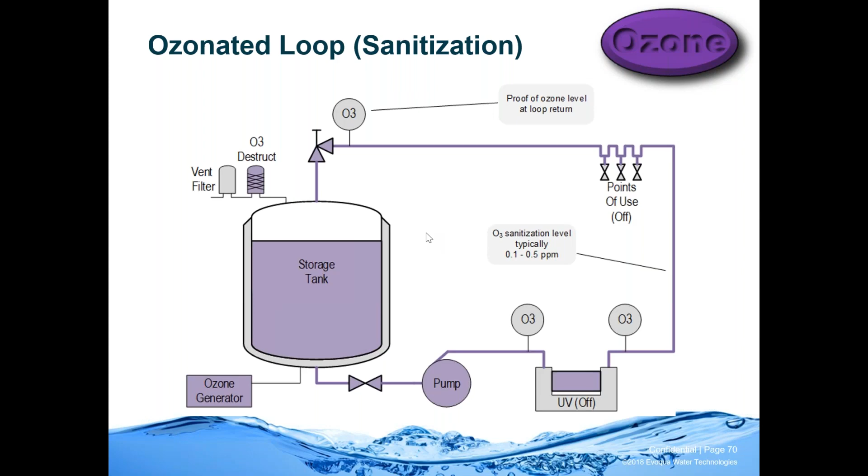There is an ISPE guide on ozone in pharmaceutical water. I would also recommend that for reading if you don't have it, if you're considering implementation of ozone. So now we've talked through incredibly quickly, I apologize for the pace, but we've talked about how to design systems to not get in microbial trouble.

What happens if you do have failed samples? What happens if there's a possibility that you have unacceptable microbial contamination?

You would want to review the test procedures for sure. You would want to view the sanitization procedures. You're probably going to conduct additional microbial tests, the number of points, the number of samples per day or week. You need to determine, can it be assessed as a sampling issue, or do you have a problem?

You may well, even before those micro results are back, do an additional sanitization. You may increase the sanitization frequency. Certainly, you'd want to assess the system and see, is there a dead leg issue? Is there a source of external contamination? As an example, the vent filter on a storage tank.

So it's both auditing the system to be sure there aren't design flaws, but it's really analyzing the data and the sanitization. Look, sometimes it's not sampling, it is a problem. Maybe the sanitization temperature hold would be longer if it's heat, or a chemical hold, or an ozone level in sanitization.